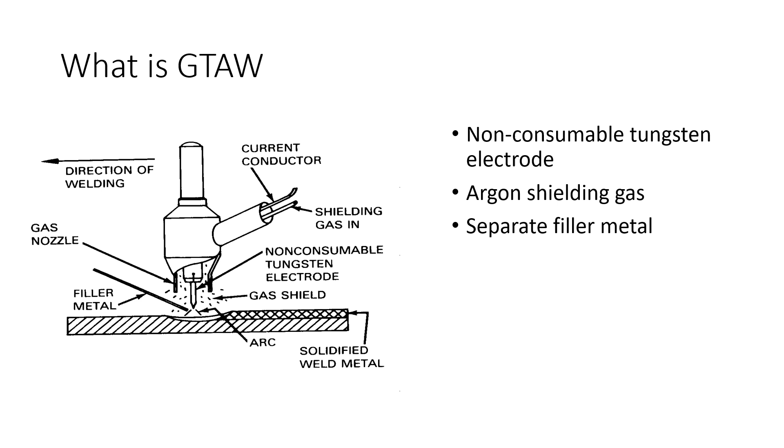So we use a separate filler metal separate from our electrode. And this is different than most other welding processes where our electrode is also being consumed and it's our filler metal. And we usually use an argon shielding gas. We can use other gases such as helium, but we need an inert gas when we're going to use gas tungsten arc welding. This protects our non-consumable tungsten electrode. It also protects our weld puddle from oxygen and nitrogen.

So why do we use gas tungsten arc welding for stainless? We can use other processes. Well, gas tungsten arc welding is clean, it's precise, it gives us really precise welds, there's low spatter, really good control, and it protects the corrosion resistance of the material.

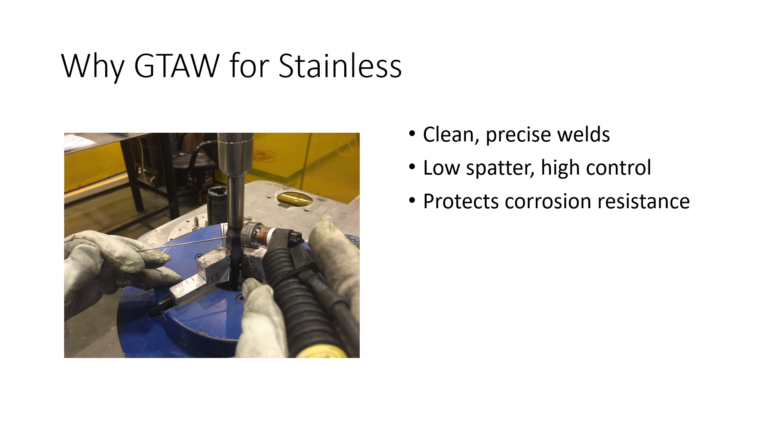And this is, I snagged this out of a U.S. military manual, so great place to get content. But anyways,

Here's a good shot of what the basic TIG setup looks like. So here you can see the parts of the torch. Torches for TIG welding, these are going to be different than other processes because most other processes don't have a non-consumable tungsten electrode. So we can get a lot of different types and sizes. We can get big water-cooled ones. We can get smaller air-cooled or gas-cooled.

So the two things that the torch does is it's going to carry electricity to the weld puddle, and it's going to carry shielding gas to cover that weld puddle because oxygen and nitrogen are not our friends, and they're trying to get in there and damage or corrupt our weld puddle, our stainless steel weld puddle.

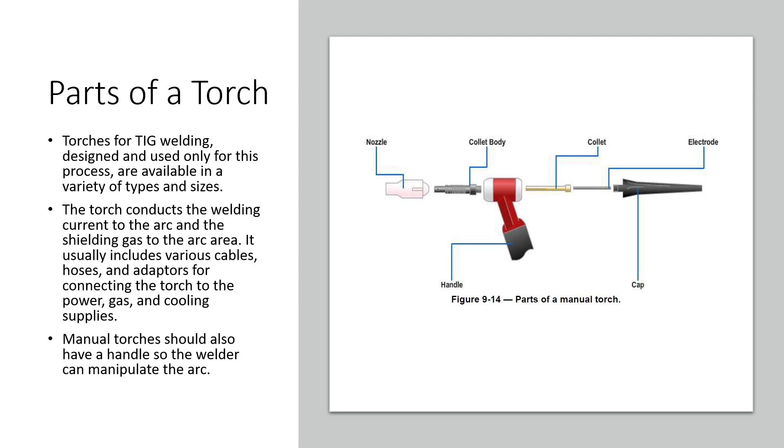Power sources for welding machine. This is where we get the electricity. So we take some current, some amperage, some voltage from a supply, the power line or the power company or however that magically gets to us, and then it's going to turn it into a usable current. We're going to take 230 or 460 volts of input power, and then we're going to turn it into the amperage and voltage that we need.

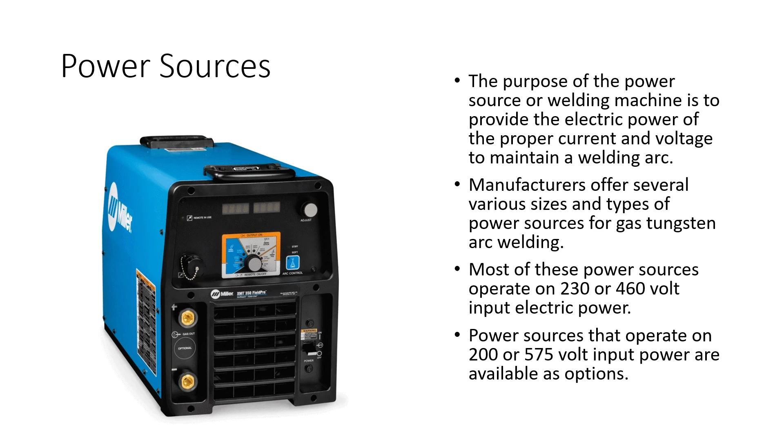We're going to go from 230 or 460 volts of input electricity into maybe 20 amps and 100 amps and 20 some volts. We're stepping it down from whatever we're intaking, but we get a usable, controllable quantity of electricity going to our weld puddle through our non-consumable tungsten electrode.

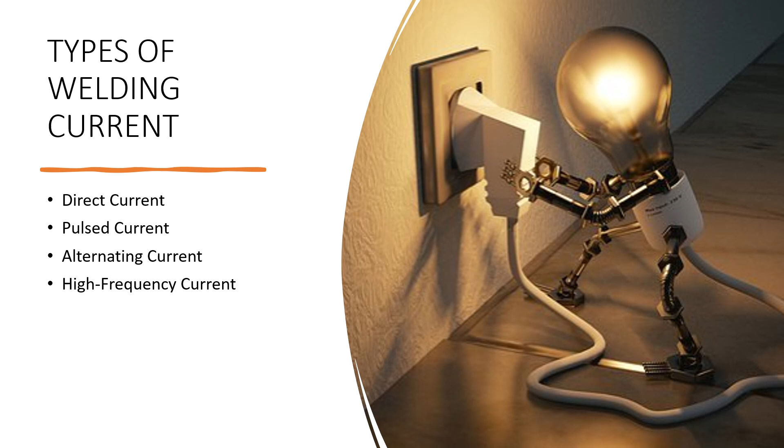So we've got different types of welding current. We've got direct current, pulsed current, alternating current, and high frequency current. So direct current, this is the one we're mainly going to talk about. But this is like a car battery. The electricity just goes one direction. It's just like a loop.

Direct current, we're going to send it through conductors, our welding cables and our ground cables. So this is like a big battery sending us direct current, and it just goes one direction. This is different than alternating current, which I understand, but how it goes both directions to me is one of those mysteries of the universe.

But direct current we're going to use for most materials that are not aluminum. That's what we use direct current for, anything that's pretty much not aluminum. We use alternating current for aluminum because the alternating current busts up the oxide that forms on the surface of the material, or the weld puddle. So that's why we use alternating current there. It gives us some stuff that direct current doesn't.

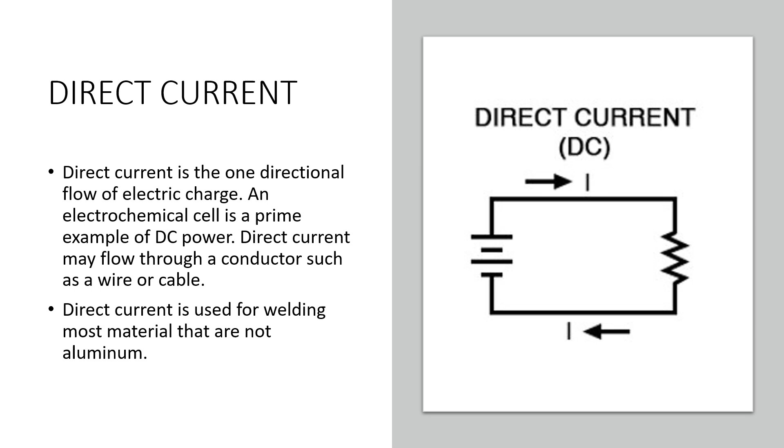So when we're talking about direct current, we've got two different ways we can run the electricity. We can go electrode positive and electrode negative. If we go electrode positive, what happens is 70% of the heat is in the electrode and 30% of the heat's in the base metal. So you're going to get a pretty wide, shallow penetration. But this might be what we're wanting if we're welding some thin material like beer can material. And I know that's a gross over exaggeration, but some thin materials, we don't want deep penetration.

Well, if we go DC electrode negative, which is also straight polarity, we're going to get a narrow melted area, and about 30% of the heat's going to be in the electrode and 70% of the heat's in the base material. And you can see here, if we're using DC electrode positive, we're going to have a really large tungsten electrode so we can soak up a bunch of heat. So DC electrode negative, we're focusing the heat in the work, and this is standard for stainless. So AC we're going to use with aluminum, and DC electrode positive we're going to use when we weld really thin materials.

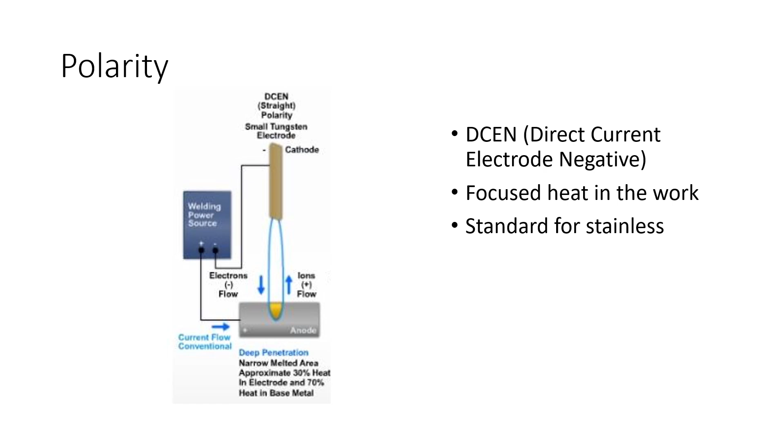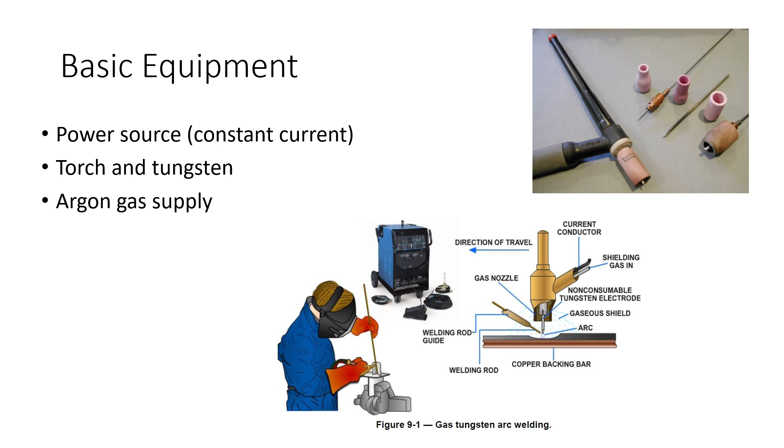So now that we've got our understanding of our basic equipment, we've got a general idea of the power source, what kind of current we're going to be utilizing. We understand a little bit about the torch and the function of the tungsten. We got a little bit of knowledge about the argon gas supply. Well, let's talk about the shop setup, the reality of stainless. What are we welding? Stainless.

Well, the thing with stainless, or any TIG welding, what you're welding is going to be different. And I know that sounds stupid the way I just phrased it, but if we're welding titanium, we're going to have to approach that completely different than we approach welding stainless. If we're welding carbon steel, we're going to have to approach it different than stainless steel. So then it's going to ask questions of what are we really doing? Are we going to do this on a bench? Are we going to do it on a positioner, or is it going to be in a pipe rack or a skid where we're welding this stuff?

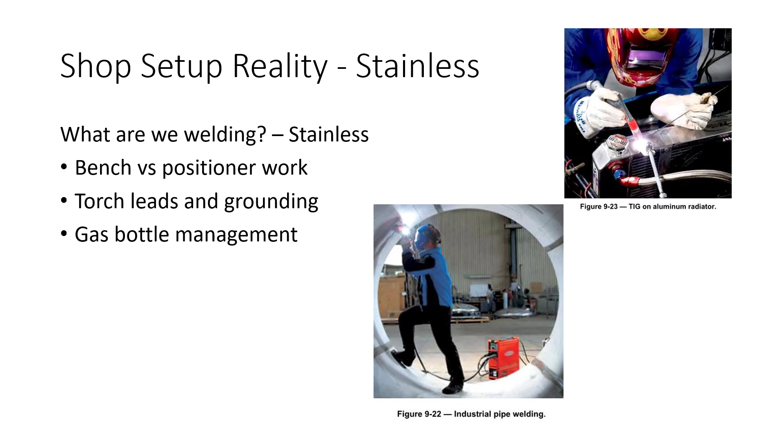We're going to need the torch leads, and we're going to need grounding. How are we going to ground this thing? Where are we welding this stuff? And we're going to have to deal with gas flow. How are we getting gas to our torches? These are some things that we need to talk about, but they aren't the focus of our little module here. So with that being said, let's say we have something set up and we're welding stainless. Where can it go wrong? This is what we're going to focus on for the next couple slide decks: poor cleanliness, no purge, too much heat. We haven't touched base on those things yet, but we will.

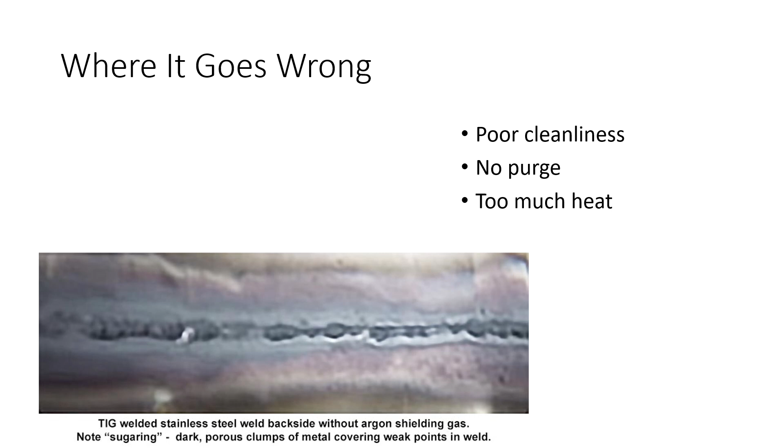So the bottom line, when we're welding with gas tungsten arc welding, it's going to give us control. Stainless is unforgiving, and setup is going to matter. And we're going to talk about that later on.